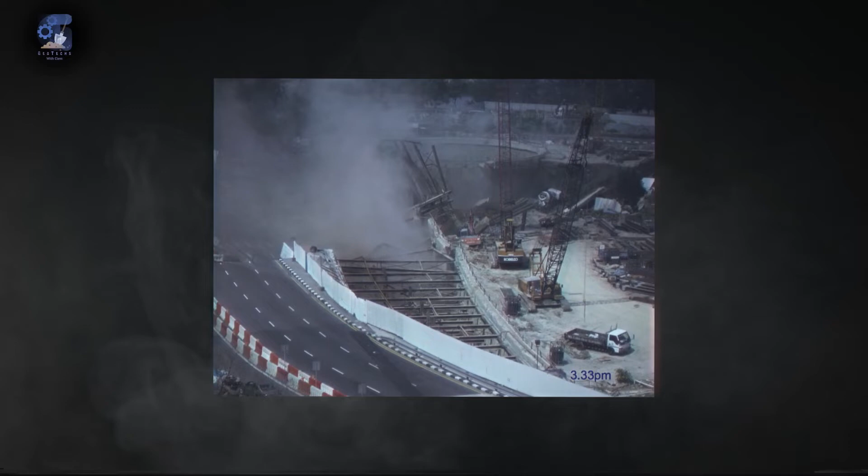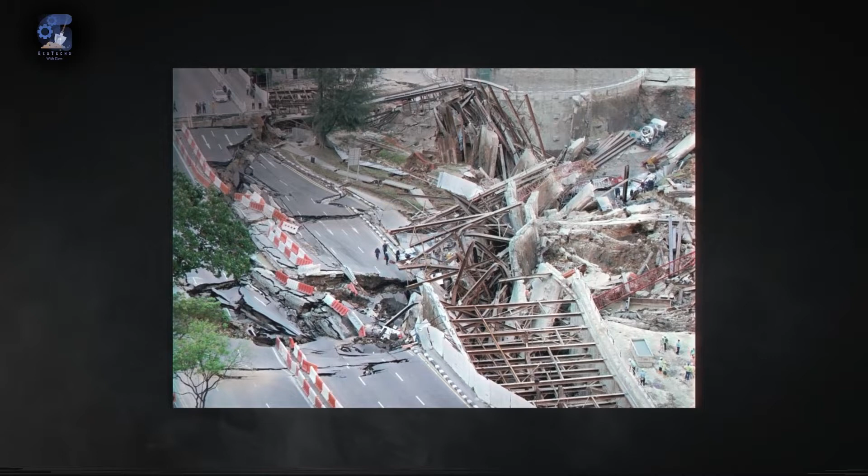On the 20th of April 2004, Singapore witnessed a catastrophic engineering failure that shook the nation. During the construction of a subway line, an 80-meter long and 30 meters deep excavation section completely collapsed. The resulting crater was as deep as 15 meters and was more than 100 meters in diameter. 6 lanes of an adjacent Nicoll Highway subsided by as much as 13 meters into the ground.

My name is Chido Chashe, and in this video, let's dive deep into the geotechnical engineering failure and the subsequent structural failures that led to the collapse of Project C824.

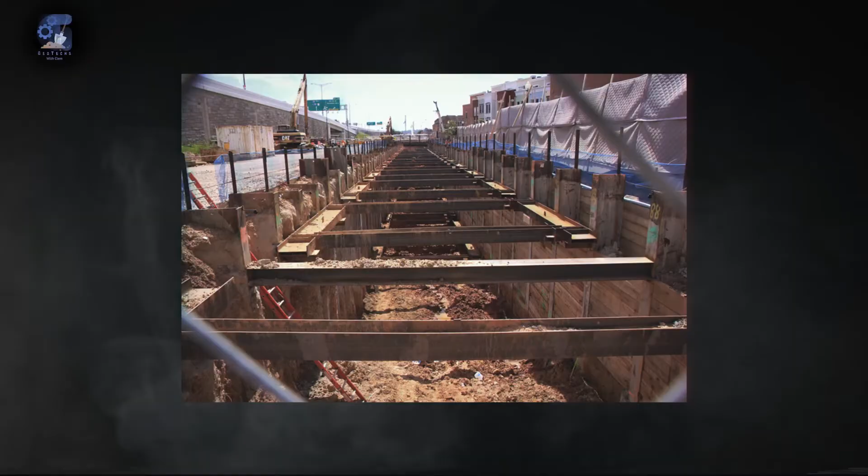A well-renowned Singaporean construction company was awarded a contract to construct a new underground mass rapid transit system on behalf of the Land Transport Authority. The company adopted the cut-and-cover construction method for the tunnel construction. The method had been used extensively in Singapore to construct subway systems for more than 25 years, meaning that the construction company had good working experience with this method.

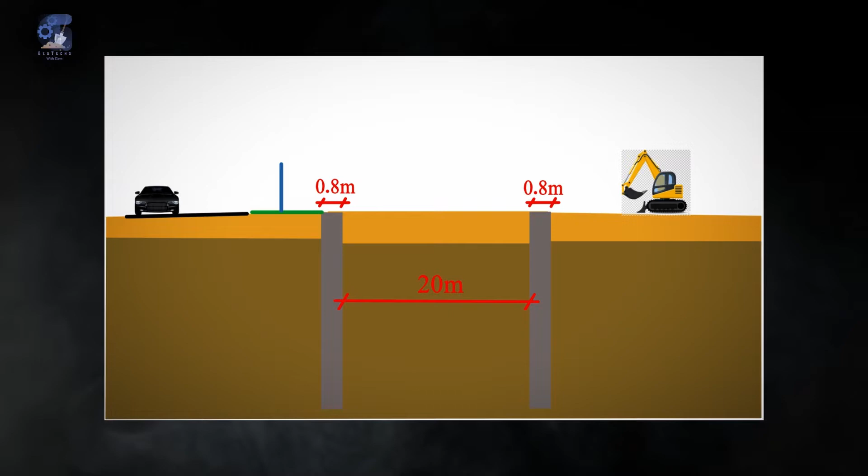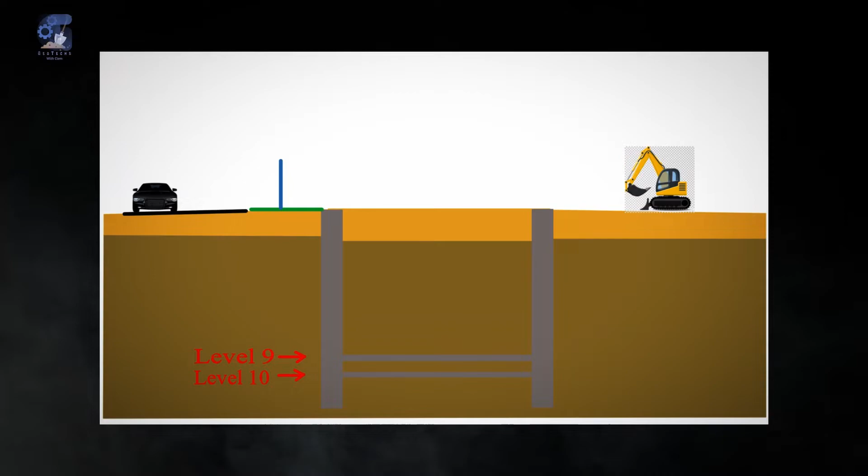The excavation was in progress when the collapse occurred. 0.8 meter thick reinforced concrete diaphragm walls had been constructed about 20 meters apart. Prior to bulk excavation, jet grout piling had been installed in 2 horizontal layers at levels 9 and 10 to act as buried strutting and provide strength and stability to the soft soil as the base was being excavated.

As excavation advanced, steel struts were installed to support the lateral earth pressure. At the time of the collapse, 9 levels of struts had been installed, and the excavation had reached a depth of about 30 meters. The collapse was so sudden and dramatic that the early press reports headlined, "Gas explosion collapses tunnel." However, the inverse was true, and it was soon discovered that the collapse of the excavation caused a rupture of a gas main under the adjacent road.

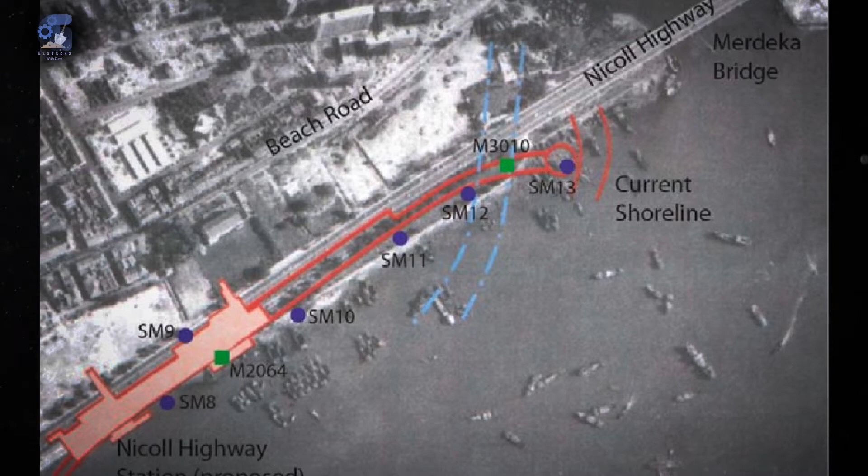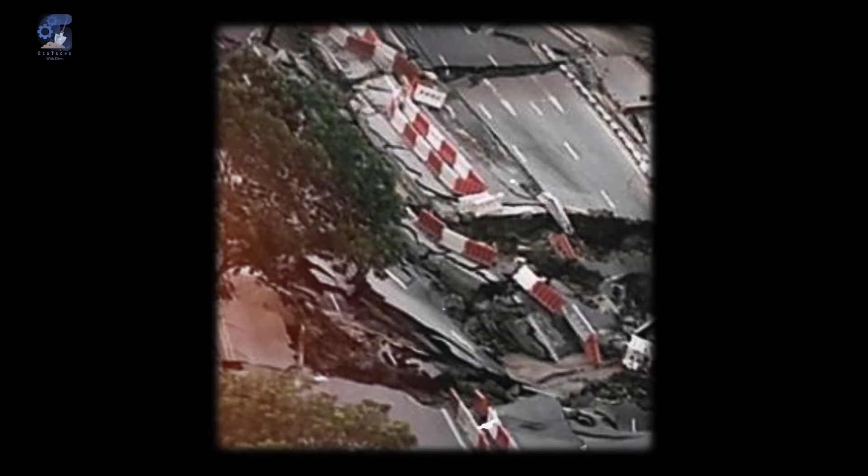As for the geologic formation of this site, an aerial photograph from 1969 showed that the site was formed by land reclamation when dredged sand about 3 to 5 meters thick was placed on a shallow seabed over about 30 meters of very soft to soft marine clay with very low shear strength. This geologic formation was a critical contributor to the collapse of the excavation.

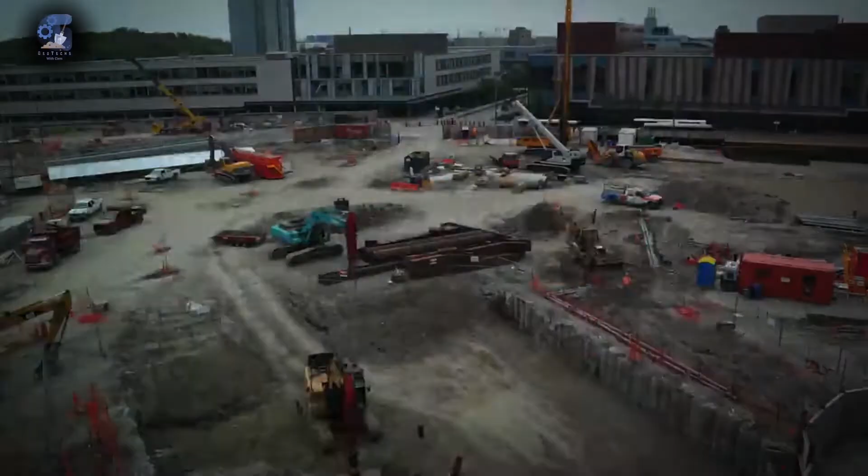The main problem that led to the collapse of the tunnel was mainly soil shear failure along the marine clay layer, which triggered a domino effect leading to large wall deflections and buckling of the under-designed supporting struts. You see, in the design of multi-stage and complex excavations, the use of computer software is often required so as to paint a clear picture of the soil structure interaction during and after the excavation process.

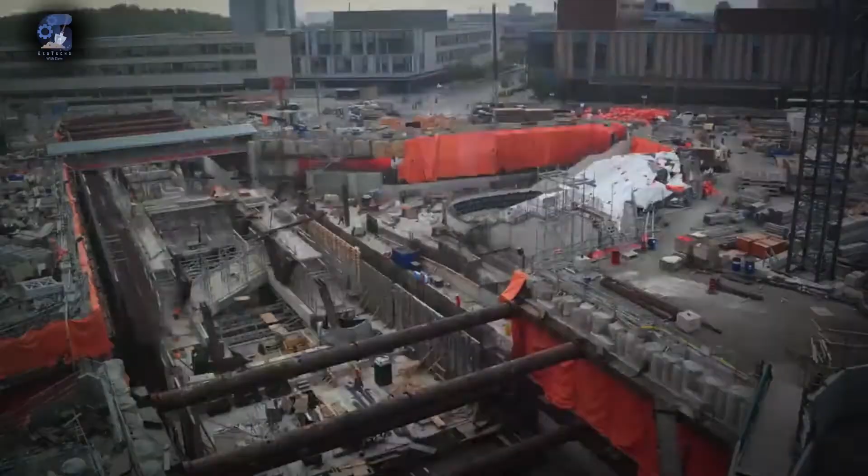Before we dive deep into the actual events and the causes of the collapse, it is important to understand a few basic characteristics and mechanisms of soil. You see, the soil strength is heavily governed by the amount of moisture in the void spaces and the ability of that moisture to drain when soil is loaded. So, what do I mean by this?

Let's take 2 water-saturated soil samples and subject them to a triaxial shear force. The first sample is sheared in a drained condition, meaning that the build-up pore water pressure is allowed to flow out. The other sample is sheared in an undrained condition, a condition that restricts water from escaping the void spaces.

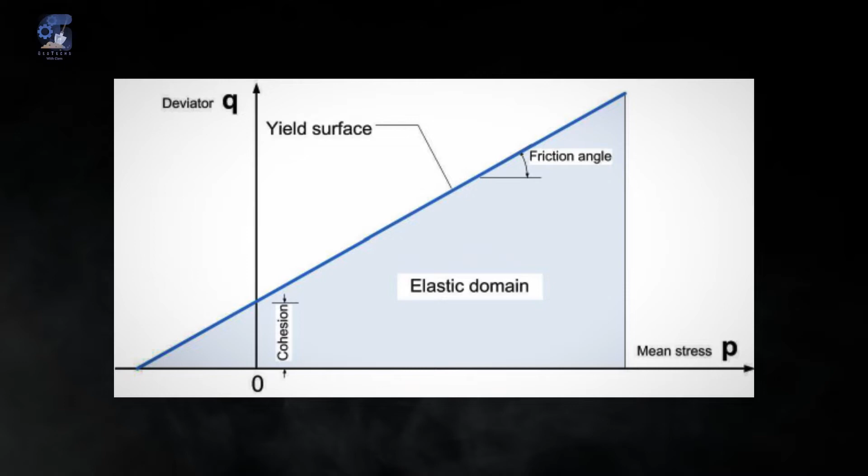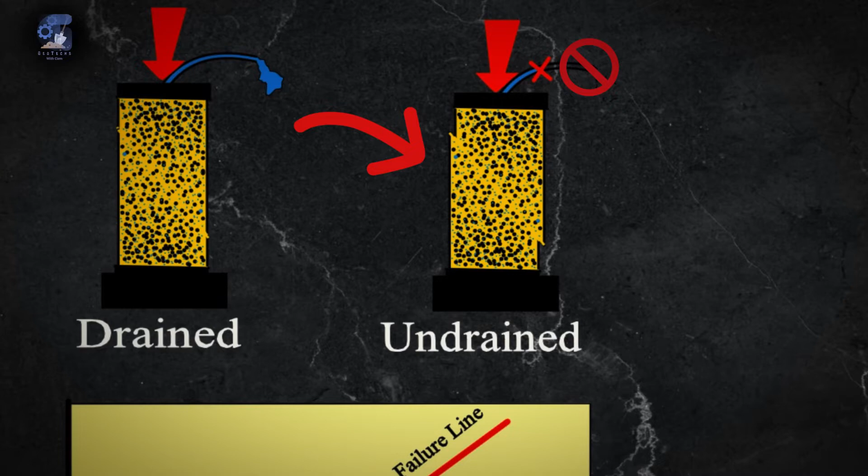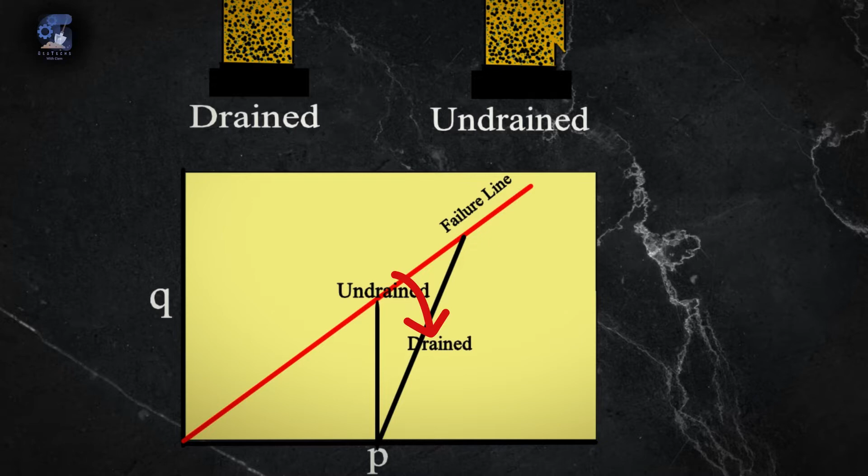In plotting the stress path on a PQ graph to visualize the stresses experienced by the soil samples during shearing, the stress path of soil sample A, sheared in an undrained setting with no change in soil volume, moves vertically upwards until it reaches the failure line. On the other hand, the stress path of soil sample B progresses towards the failure line at an angle. This is because, as the water escapes the void spaces, a process known as consolidation, the soil mobilizes shear strength due to the increase in soil particle contacts.

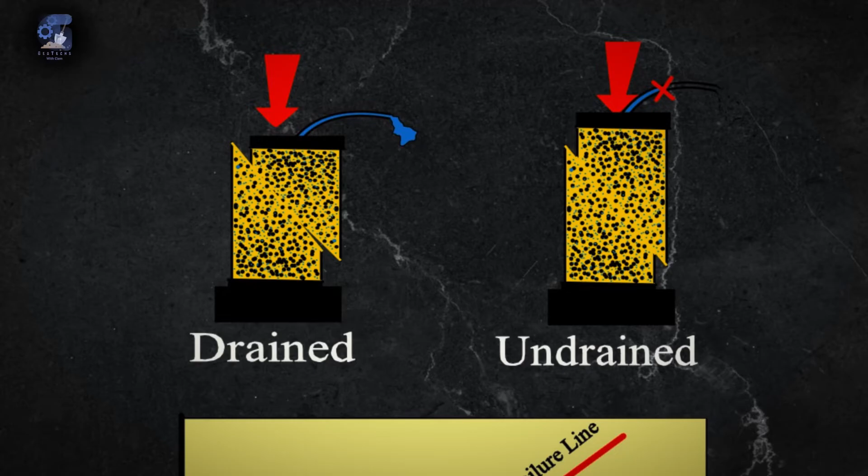In many cases, the drained behavior of soil is critical for excavation works. However, the undrained behavior is still relevant and appropriate for soil with very low permeability. In project C824, most of the soil supported by the diaphragm wall was soft marine clay that would not drain significantly during the construction works.

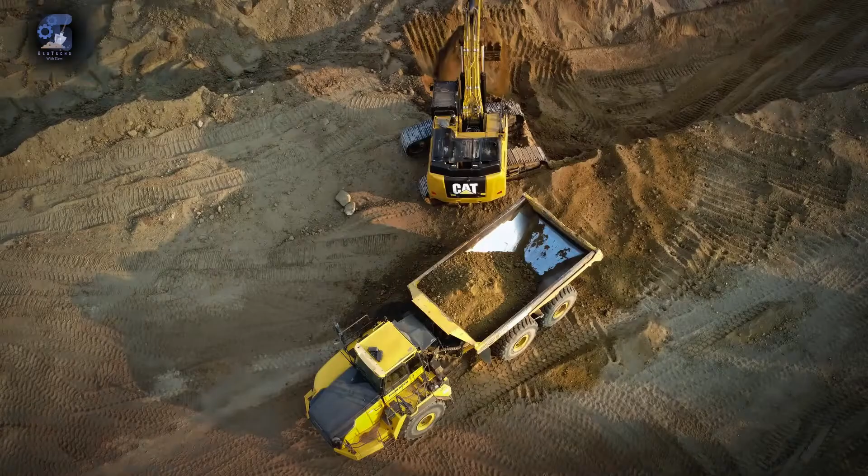In the forensic review of the project C824 disaster, it was discovered that the designers chose to model the undrained soil behavior using the effective stress parameters. That is, they made a cardinal mistake in assuming that the soil would exhibit drained behavior during excavation. Though it's not recommended, it is not uncommon for geotechnical engineers to use this method in design. And here's the reason why.

The advantage of this is that the shear strength increase due to the consolidation can be used in the design, resulting in reduced costs when it comes to the construction materials needed. However, the project designers failed to recognize that this increase in soil shear strength is quantitatively wrong, especially for soft clay.

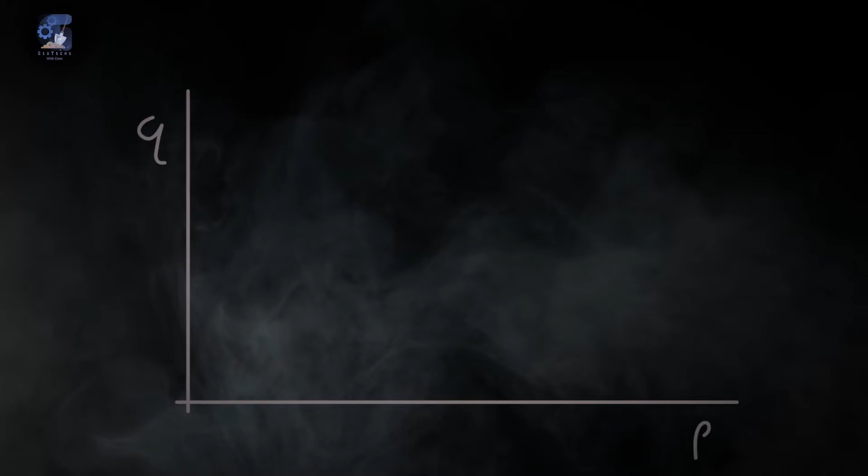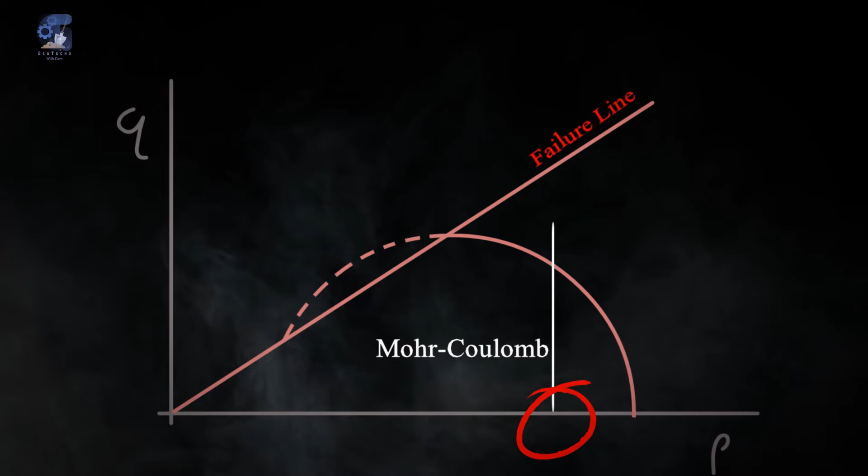Picture this. If we go back to our PQ plot and input the effective strength parameters C and Phi, whereby the shear strength is calculated using the Mohr-Coulomb model with an undrained setting. As I described earlier, the soil does not change in volume, resulting in no change in isotropic stress, meaning that the shear stress is resisted entirely by the water in the soil.

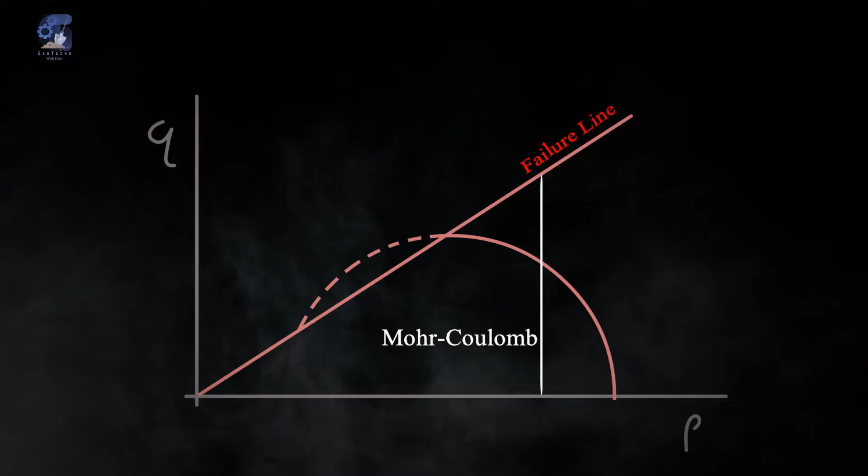I want you to notice something here. Drained parameters were used in the model rather than undrained parameters. This resulted in an overestimation of the strength of the clay. The forces and moments in the retaining walls were grossly underestimated, and the deflections predicted were too optimistic. As a consequence, the earth retaining system was under-designed and inadequately sized, compromising the whole project before construction even started.

In the aftermath of the collapse, the back analysis of the collapsed wall performed by an independent committee of inquiry revealed that the bending moments and deflections were underestimated by up to 50%. That retaining wall, which was only about 0.8 meters thick, was supposed to be 1.5 meters thick to adequately support the excavation.

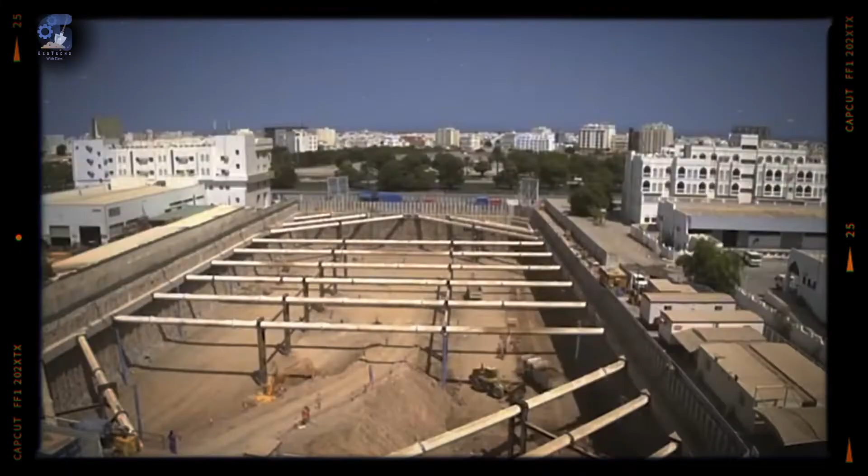With the failure of soil and the inadequacies of the retaining wall, it was up to the strutting system to resist the lateral earth pressure and prevent the excavation from caving in, more like the last line of defense. A strutting system is a type of support system for deep excavations that involves installing horizontal beams between vertical walls of the excavation. Strutting systems for deep excavations require careful designs and installation. On a properly designed strutting system, the steel beams, king posts, and the connections should have sufficient load-bearing capacity to carry all the lateral load and prevent the excavation from caving in.

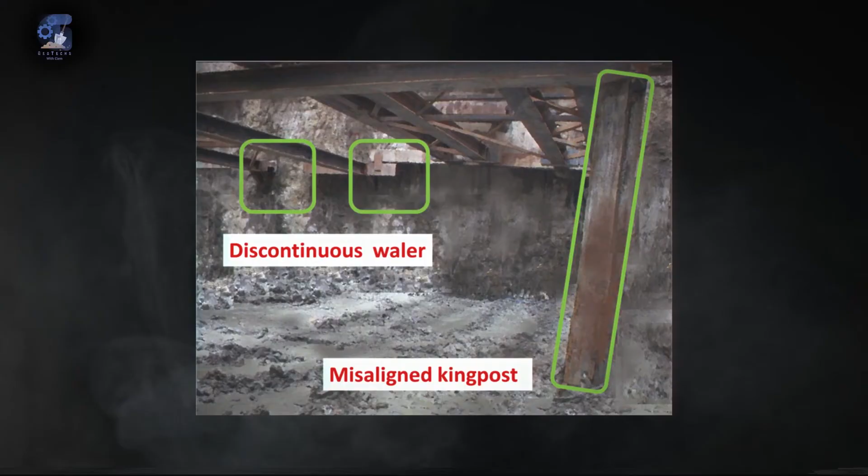In project C824, there were many inadequacies in the design of the strutting system. For example, there were cases where struts were bearing directly onto the diaphragm wall panels without a waler. The fundamental purpose of a waler is to provide a continuous line support to the retaining wall so that the loads can be redistributed and mitigate the effects of eccentricity and provide the tying effect needed to prevent opening up of the wall joints. When this fundamental was omitted, the effectiveness of the strutting support system was somewhat compromised.

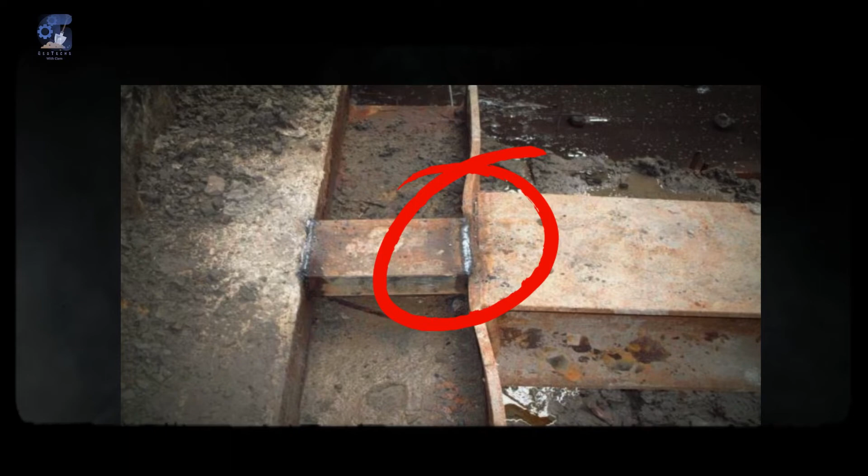The events leading to the collapse were quite revealing. You see, back in February of 2004, just 2 months before the collapse, there had been problems at an adjacent section of the excavation. The contractor discovered that the waler was buckling at the connection with the strut. The joint was retrofitted by welding a C-channel stiffener to the waler beam. This was already a red flag that was not supposed to be ignored.

An expert from the Land Transport Authority argued that the computer program had been used incorrectly during the design stage, and as a consequence, the deflections and the bending moments in the walling were underestimated. But guess what? The contractor disagreed with this sentiment.

In the early hours of the day of the collapse, similar distresses were observed on a waler of level 8 and level 9, which happened to be the location of the initiation of the collapse. In a last-ditch effort to save the project, a team was mobilized to reinforce the walers by pouring concrete into the upper half of the H-section. The situation seemed to have stabilized momentarily.

However, during the morning, the situation became worse. The distortions on the waler reached a critical state. The workers were instructed to abandon level 9 and start working on level 8. By mid-afternoon, the order was given to evacuate the site. Sadly, it was a little bit too late, and unfortunately, the whole section collapsed, killing 4 workers, including a site manager who had stayed behind to make sure everyone had evacuated safely. His body was never recovered.